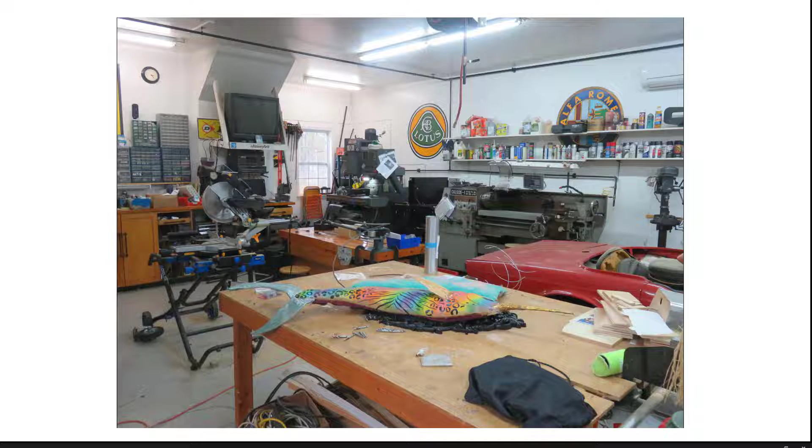When we lived in Michigan from 2007 through 2009, you could buy machine tools for pennies on the dollar. The lathe you can see in this photo cost me $500. The milling machine you'll see in a moment cost me $3,000. There's the mill in the corner, the CNC mill. The machine tools were so cheap you could rig a workshop up for almost nothing.

So it was very easy for me to set up a nice workshop. I hadn't retired yet, so all of this stuff was actually in a storage unit up in Michigan until we moved down to North Carolina, and then I was able to set up my workshop.

But Donny was an interesting person, fun to talk to, because he basically built boats that aren't glass fiber hulls - they're triple laminated cross-ply boats. Super light, super fast. These are 50, 60 mile an hour boats that can deal with 2-3 meter waves. But a nice guy.

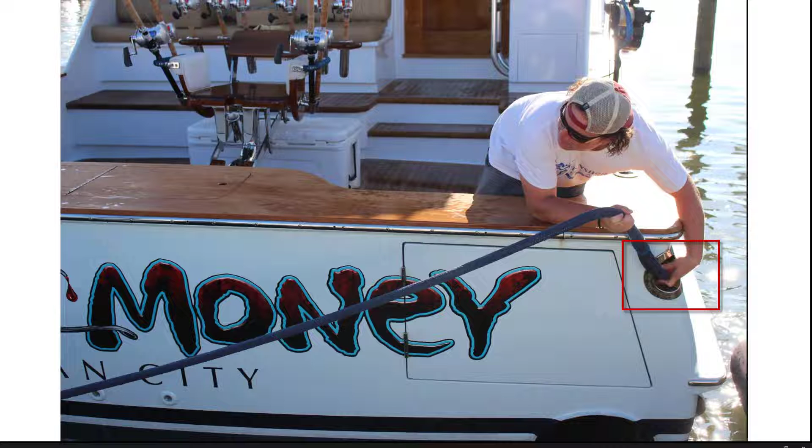Donny had chatted to me about making hawse pipes. You're probably wondering what they are - that little red box on the right side of the screen, you can see that young man feeding a mooring line, a stern mooring line, through the hawse pipe aperture. Now, Donny didn't like the fact that most hawse pipes on the transom or stern of a boat were either on the transom or along the side of the boat running forward on the hull. He wanted them on the corner, which meant they were very difficult to make.

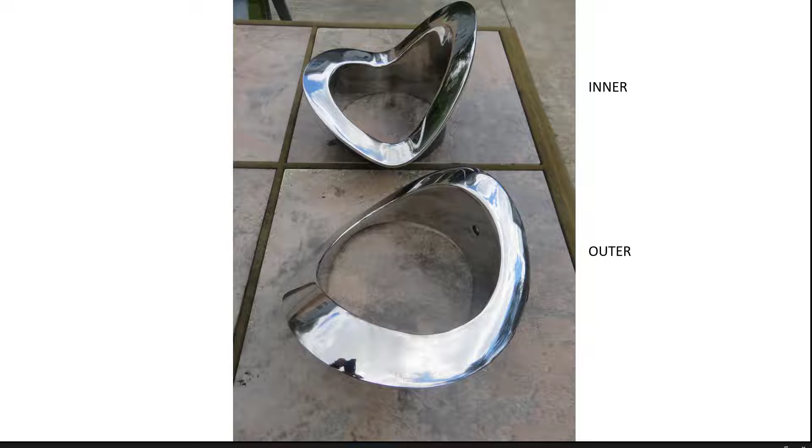So he had made them himself in-house and made a horrible job of it. He asked me if I'd be interested in making hawse pipes. The first set were actually made by my daughter with my help. She was in transition from her work in Austin before she went to Barcelona - she had a degree in graphics, but was also a very accomplished welder and 3D sculptor. So she actually started on these projects.

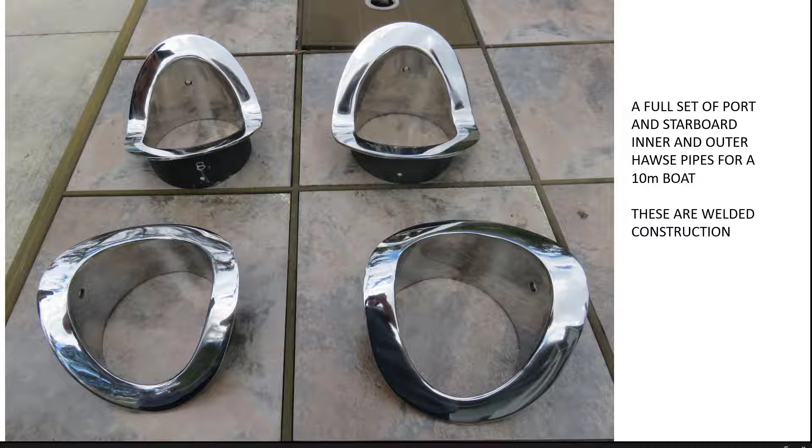We found a really good TIG welder nearby who did the welding. Basically it was a 6-inch pipe, 150mm pipe, with a flange that we bent. We had to CNC machine the bucks and dies and bend them to shape, all done using CAD. But that's not really the most interesting part - it's when we get on to where Donny went next.

One day he asked me, he said, you've got a CNC mill, why don't we machine these pipes? I said yes, and I ended up with a project that was probably the most complex I've ever dealt with in my professional machining career, which I must admit is very short.

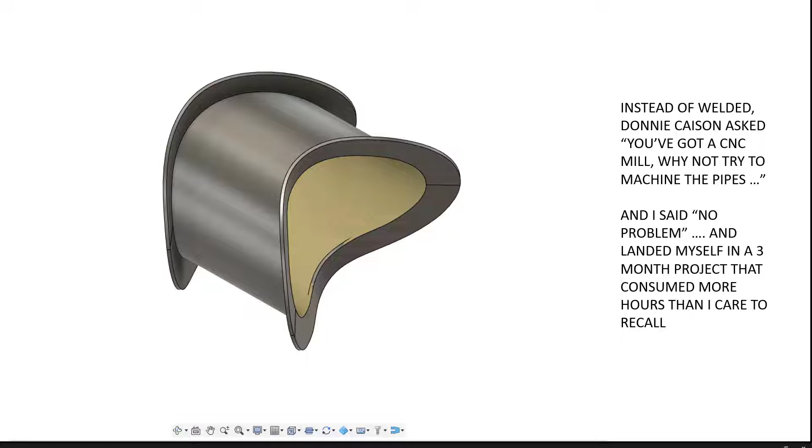We first started off with looking at how you model the surface of the boat, both inside and outside. This is the starboard side, the right-hand side of a boat called Blood Money. It wasn't called Blood Money at that time, it was unnamed. It was a 64-foot boat, and you can see where the hawse pipe hole has been bored through from the outside of the hull to the inside. It's a custom boat, so the curves on the other side are different.

Donnie had been using photogrammetry tools for a long time to machine parts. He'd got a very comprehensive CNC routing system in his shop, but I'd never come across it, so we used that to map the hull.

Once we got the hull mapped, we were able to work out the curvature on the tube that passes through the hull, because without knowing the shape of that, it would be difficult to put the flanges onto the two pieces. But more importantly, it meant we could also work out the alignment between the outer and the inner and the distances between them.

So this was the tube. The photogrammetry, incidentally, you'll see a little bit more of that in a second.

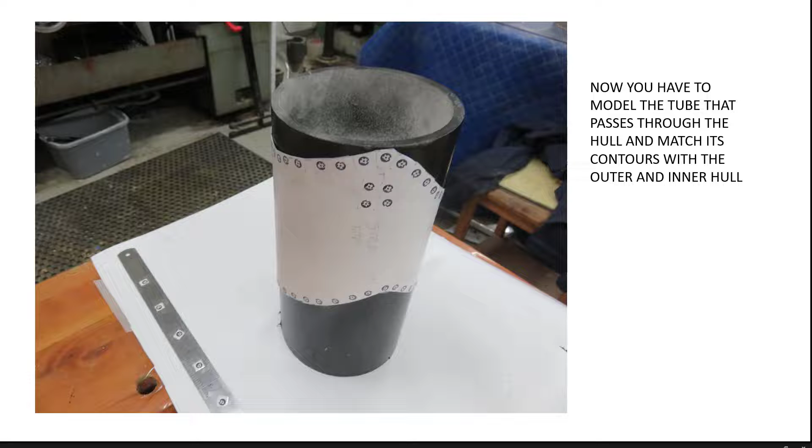The photogrammetry was then used - they made flanges and pulled them off the hull. So this is an inner flange. They laid it up, let it set, pulled it off, and then cut the perimeter to be about 60mm all the way around to give us the shape of the hull. This had to be done on both inner and outer, on port and starboard, so we've got 4 of these things.

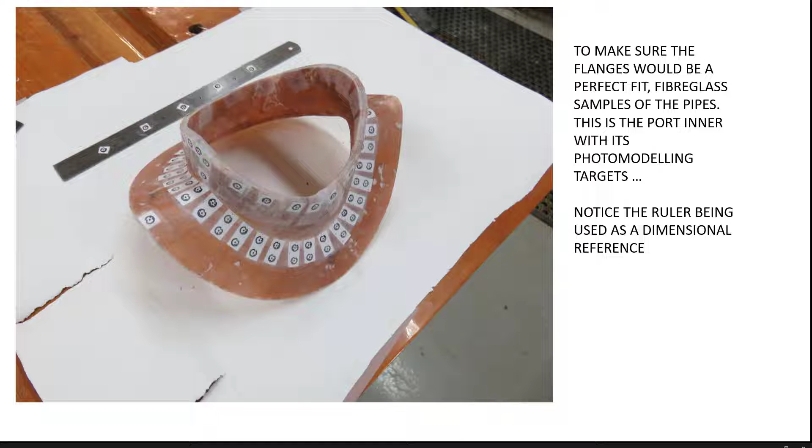The photogrammetry was then used - you took probably 100 to 150 digital photos from every single angle and fed them into the photogrammetry software, which produced a 3D image of this particular object that could then be fed into a CAD package.

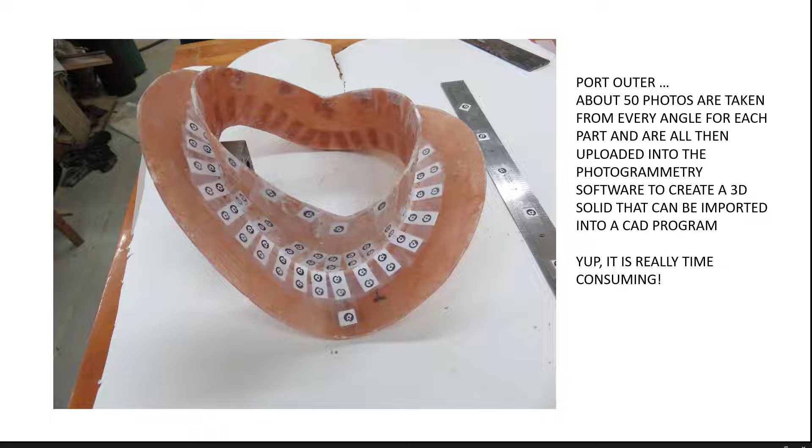Here is the port outer. You can see the curvature of the outside of the hull, and where the sleeve or the tube runs away from that. Very, very time consuming - this probably took, I don't know, 2-3 weeks to do all of this. Not full time, but it took a while.

Once we got those all created as 3D images, I was able to put them into Fusion 360, which is the CAD system I use. Very comprehensive - so much nicer than the old 2D drawing techniques I used. Even though I taught A-level technical drawing, boy, this makes life so much easier. So we produced the drawings in CAD, and we could then move on from there.

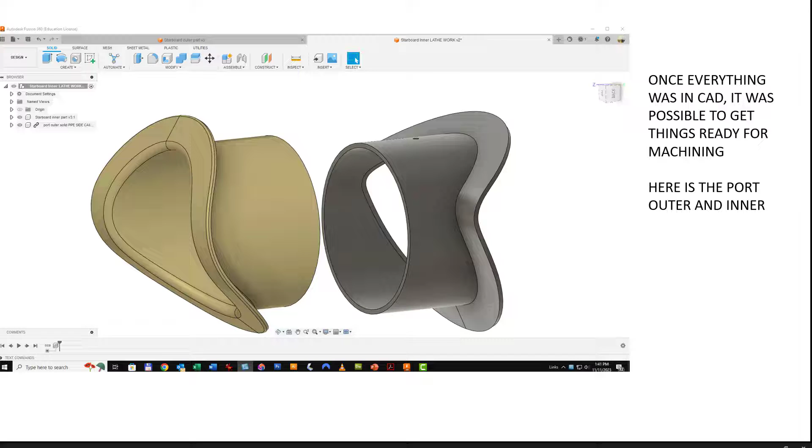But CAM is the next phase of this, and you can see here a toolpath map. Let's have a look - it looks like that's a finishing cut using a 16mm bull-nosed cutter, and you can see its predicted paths. I ran this for every single cut before it ever went on the machine - you had to know everything was going to be fine. The simulations will also show you if there are going to be any tool clashes or collisions with unmachined material, etc. So it's a pretty comprehensive system.

But you actually see this - it says that finishing cut is going to be a 12-hour cut, and the roughing cut that preceded it was going to be 7 hours plus. So what you're looking at there is 19 hours. But if I was leaving the machine unmanned, unobserved, I would cut it down to 50% feed rate to reduce the risk of any problems. So that basically meant we're looking at a 38-hour machining cut for this one part. Now you may understand why this took 2 months to do from beginning to end.

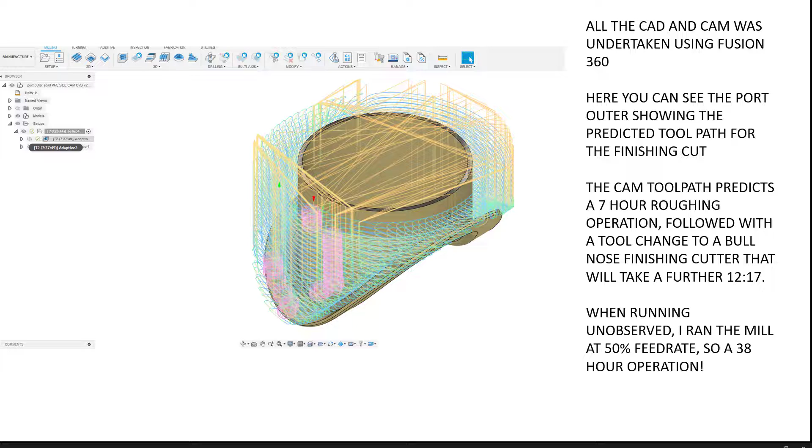I don't have any of the raw billets as they were delivered. They were delivered as a solid piece - the hole in the middle wasn't there. They weighed 47 kilograms, 177mm diameter, 7 or 8 inches, and 150mm in length.

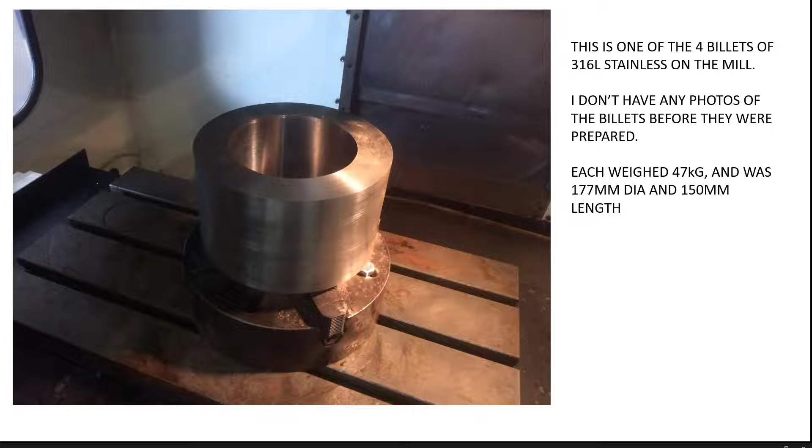Heavy as hell. The first thing I had to do was cut the centers out, but my machine shop isn't anywhere near capable of doing this level of work. So Donnie called in a few favors, and I was able to use the machining facilities over at Edwards Incorporated in North Carolina, a very large crane hire company. They have the largest crane on the east coast of the US by all accounts, with superb fabrication and construction facilities there.

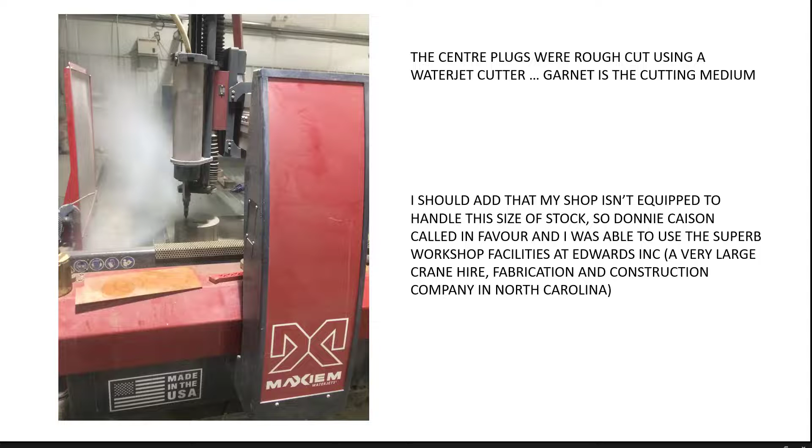This is their water jet cutter - it will cut through 200mm of stainless steel. The cutting medium is garnet, which is obviously a precious stone, but apparently it's cheap and you can get tons and tons of it from South Africa. So they were cutting that using garnet. Here is a quick video of this thing at work.

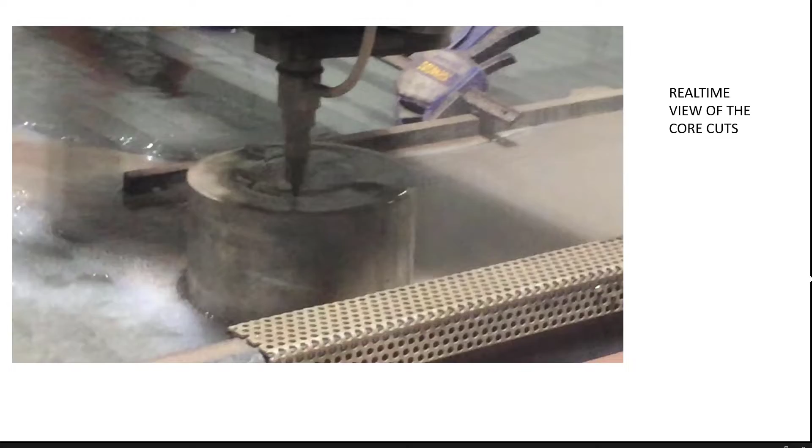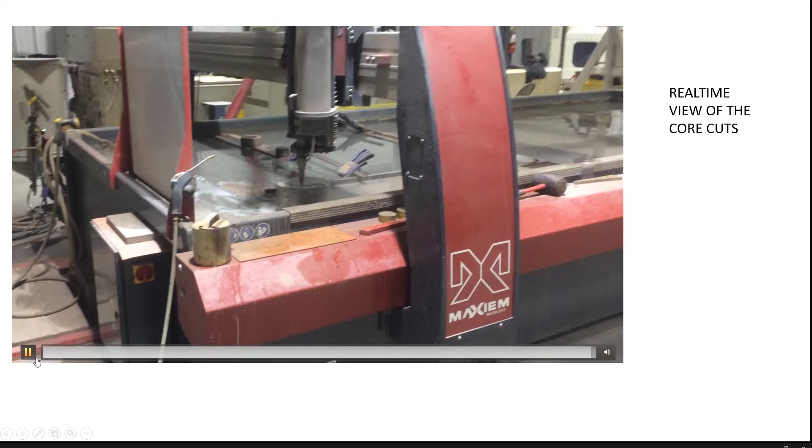Once it came off the water jet, the next phase was facing to length, and also finishing to internal diameter, the final ID. The water jet, even though it's a pretty powerful machine, leaves some trail and bend in the cut, so you have to leave about 6-8 mil for machining tolerance.

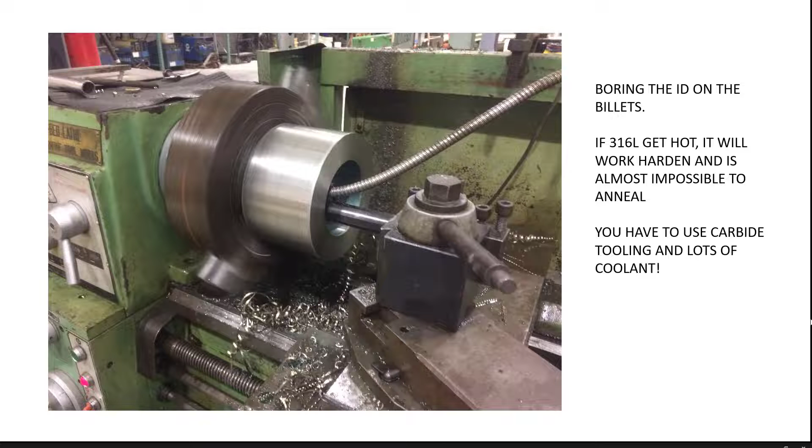So here we are on a standard manual lathe cutting this down. You have to use carbide. 316L is horrible stuff - if it gets hot, it'll work harden. And if it work hardens, it doesn't matter whether you're using carbide or diamond, you're not going to cut it. So you have to be really, really careful.

Okay, this is the end of a finishing cut on one of the outers. You can see it's fairly rough where the steps are still left in there, where the previous cutter goes through and does all the cuts.

The roughing cuts, basically, it's hogging cutting. The finish cutter however is the one that does all of the work, and it has to be 16 mil so that it can make the curvature at the root between the flat flange and the vertical sleeve, which meant it was really problematic.

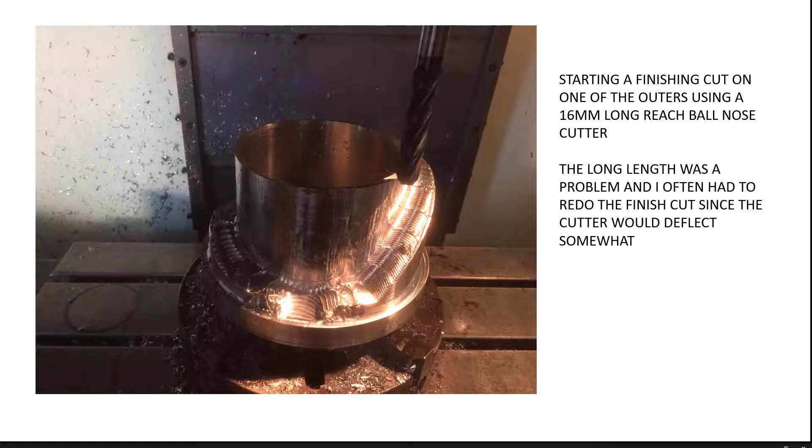I was using 175 mil cutters, way out, which meant very light cuts, very long duration cuts, but even then there would be deflection, so every single finish cut had to be run twice. Thankfully this mill was so rigid and so well tuned in that she would repeat the cuts perfectly every single time. Here's that same operation after the cut has finished.

You can see now how all of the steps have largely gone. Because this was an inner face - in other words, this piece faces the hull - I didn't have to be too worried about those slight ribbing around the core of the inner and outer, the sleeve and the flange. So I could leave it like that.

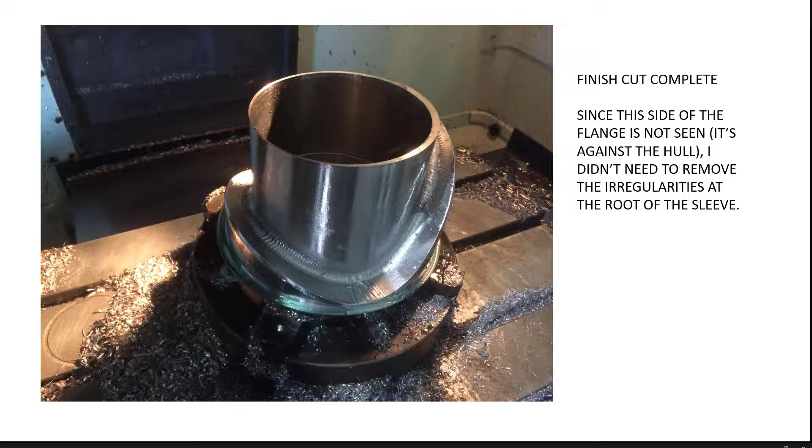Once that part was cut, I had to flip it over, and you can probably see there's a stainless steel ring around the bottom. Because the sleeve was now so thin, I had to make sure it was protected. So there was a plug inside machined to the exact diameter of the ID - you can see it sticking up on the right hand side. And then I put a sleeve around the outside to protect it from any marking.

Then cranked it in. Everything had to be indexed so that the outer cut aligned with the inner cut, so that you maintain that thickness of the flange. That took some care to actually set up. But here it is in the machine, having done a roughing cut on that surface.

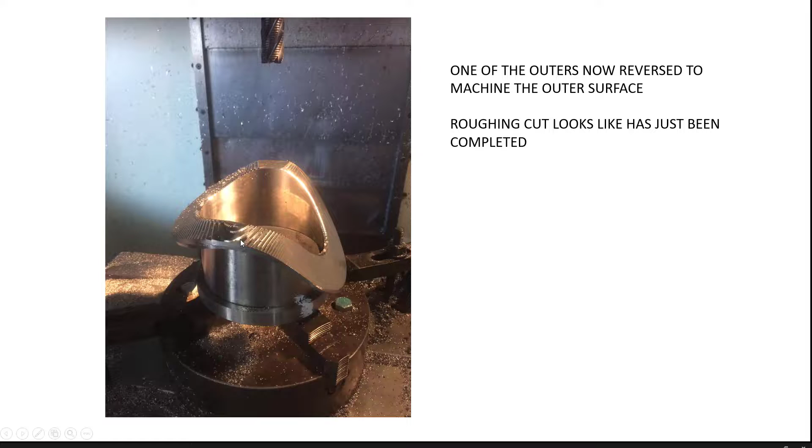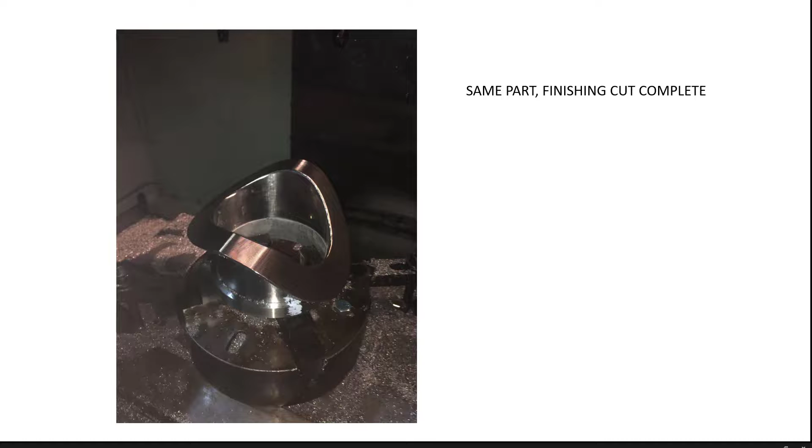This is the final cut with the finishing cut now complete. So you can now see the inner sleeve inside there. You can see how all of this has been finished, and we're now at the point where that part could be seen as being complete.

Let's just have a look. And here it is - this has come out. This is outside of the Edwards shop. All I've done is wipe this down to get the blue coolant stains off it. This is as machined. Now, when it gets back to Donnie's yard, his guys will polish this to a high polish.

You have to polish stainless steel. If you don't polish it, it will tarnish. It requires polishing so it can withstand the salt conditions while at sea, and so they polish every single inch of this, inside and outside, so that it will not tarnish over time.

But this is the first part. So what you're looking at here altogether is $2,500 worth of machining work. Each one was $2.5 grand.

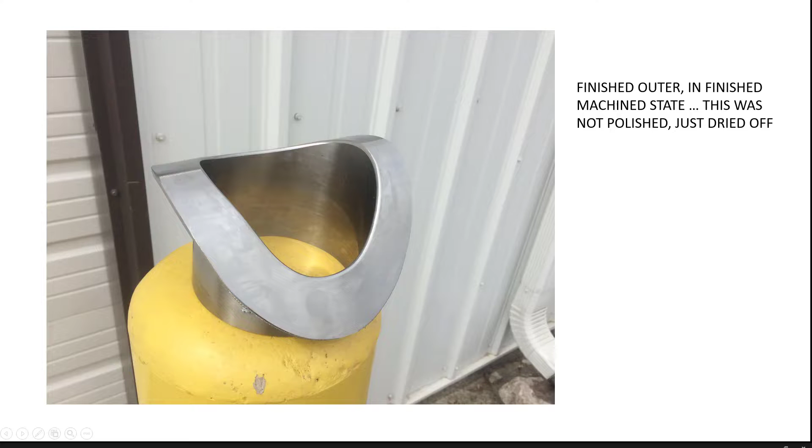But finally, I hope you've enjoyed my overview of this whole project. As I mentioned earlier, it's probably the most rewarding piece of machining I've ever done in my life, and I'm very proud of how it turned out.